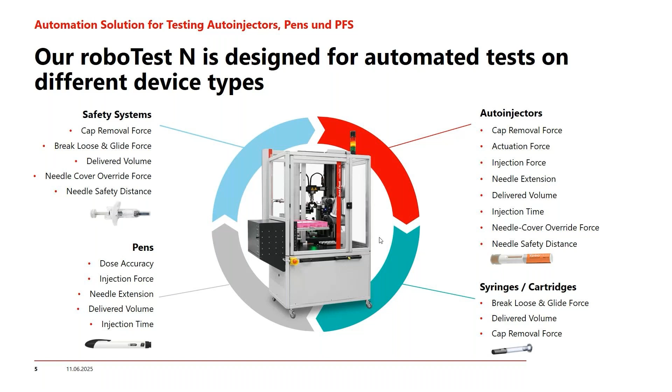A really important point is our safety concept here. We have two doors, one in front and one on the side. It's normally always the same. For every door, we have a safety switch for an extended safety door function between the robot and the testing machine, so that the doors cannot be opened while a test is running.

Additionally, we have a locking lever in the docking mechanism of the robot. So the automation can only be started after all safety switches and the locking lever are locked. This ensures maximum protection for the operator, of course.

That means if the robot is unlocked from the testing machine because of manual testing or other daily checks, then the safety housing of the machine itself will be valid.

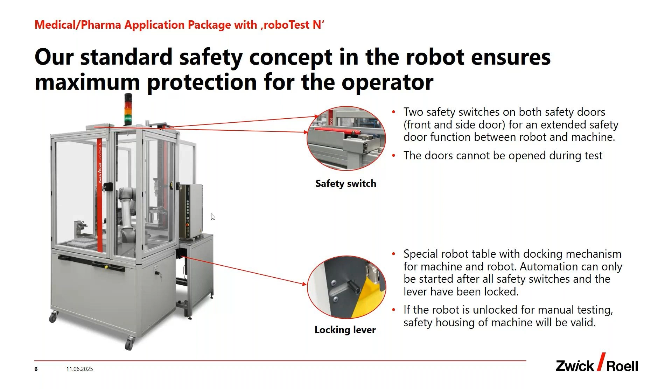Regarding maximum traceability, we have the option to implement a code scanner into the robot table. We know that in the medical industry traceability is really important, so we can read the data of the labeled devices as parameters into our software.

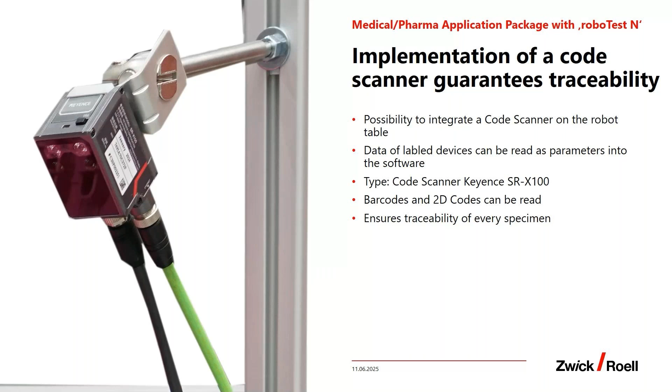For all of our automations, we have our own automation software called Autoedition. Autoedition is an intuitive software and it's really easy to operate. On the next slide, I will show you how Autoedition looks.

We are using it mainly for starting and stopping the automation, and also for preparing the specimen, as you'll see on the next slide. All of your test results are displayed as usual in testXpert.

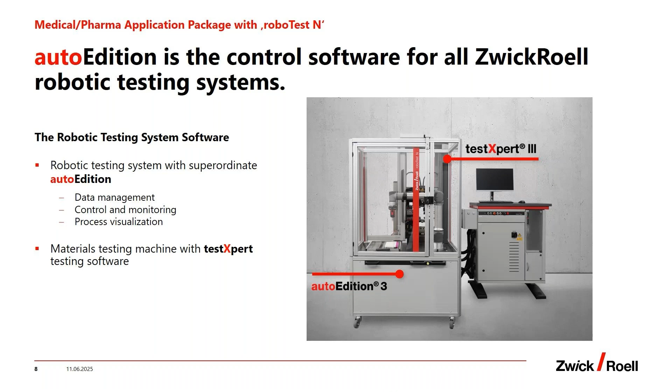Here on the slide, you can see a little better how Autoedition looks. We have the Autoedition screen divided into a main area and a toolbar. In the main area, you can see the testXpert operation window, which is standard with all your set parameters, diagrams, and results, for example.

The Autoedition toolbar includes a stop, a start, and a shutdown button, and also a button for the specimen office. In the specimen office, you can create your specimen, as mentioned before. Creating the specimen means deciding how many samples you want to test and at which row and place you want to start the automation.

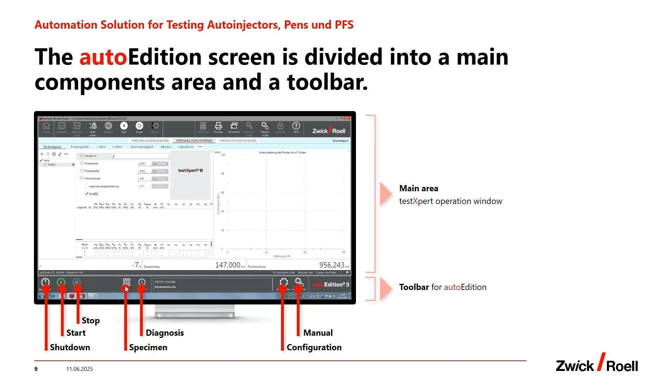On the next slides, you will get an overview about the specific features of our robot table. Here with our drawer magazine, you see it on the picture, we can increase the number of specimens to 150. That means 150 autoinjectors can be tested automatically without any interruption of the operator.

A few technical facts about the drawer magazine: we have 5 drawers for 1 tray each. The advantage here is that a customer can use their own trays, but in the beginning we have to test if the customer trays are possible at all, regarding the tray size or if there's enough gripping space between each autoinjector, for example.

If you as a customer have different device types and therefore different trays, we have different gauges on each side to adjust everything easily. The drawers have to be filled up by the operator before starting the automation, so every drawer will be filled with one of the trays.

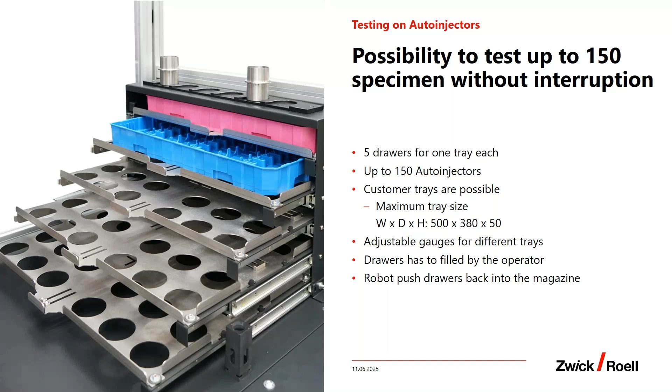So for an automatic run without interruption, there is an automatic beaker exchange required. That means we have 5 empty beakers in the beaker tray, which is stored on the drawer magazine. You can see it here on the picture, to save some space on the robot table because it's really limited there. We have 5 beakers with a capacity of approximately 100 milliliters.

So our robot replaced the full beaker out of the testing machine and replaced it with an empty one from the beaker tray. Later I will show you a video where you can see it a little bit better. After testing of the 150 specimens, the operator has to fill up the drawer magazine again and also has to empty the 5 full beakers. Then he can start the next automation again.

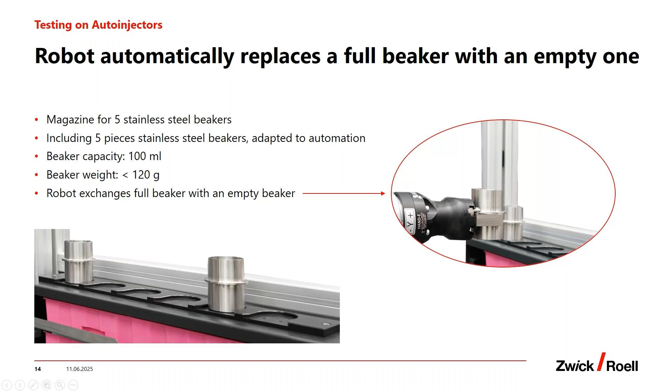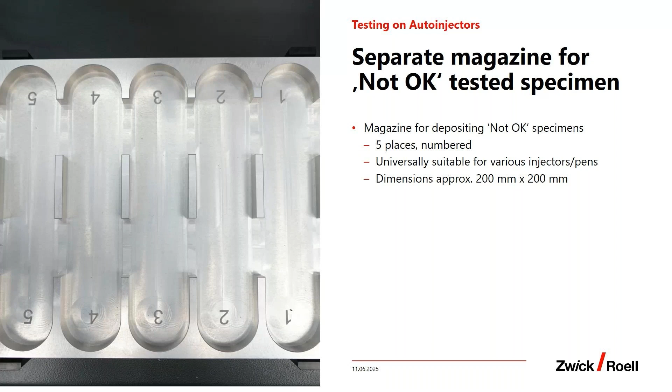So here on this slide, we have an additional small magazine for not-okay tested specimens. It's up to you, the customer, if you want to remove the tested specimen back to the drawer trays, or all not-okay specimens would be stored in this separate tray. In our opinion, we think it makes definitely sense to use the additional tray, because in this case it's easier for you to get a fast overview of all bad devices really fast. But as I said, it's only an option for you, it's not necessary.

So how does it work? The robot is picking a sample out of the tray. Then normally the barcode is scanned, you see it on the video on the next slide. The device will be placed into the testing machine. Then normally the test is starting.

At the same time, the robot picks a second sample out of the tray, scans the barcode, prepares the sample, and places the device into this additional gripper. Then when the test in the machine is finished for the first device, the robot takes out the tested sample and places it back into the tray. At the same time, the gripper places the second device into the testing machine. Then the test of the second device is started, and the complete process repeats in parallel.

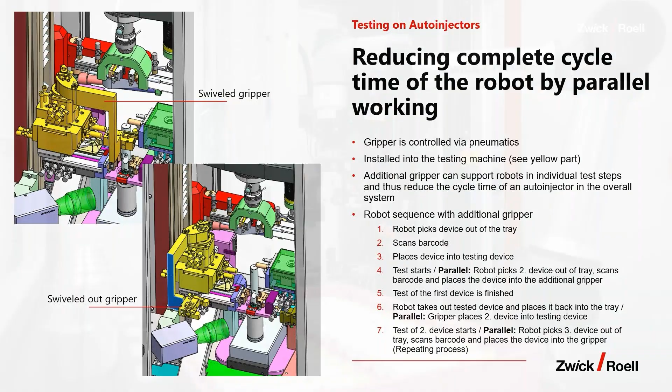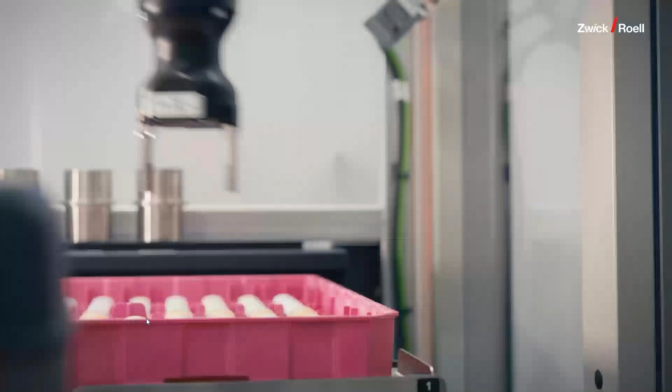So now I will show you the first video of today. Here you see a fully automated testing of autoinjectors. You see it here, the first autoinjector is removed from the first drawer tray. Then we have the barcode scanner here.

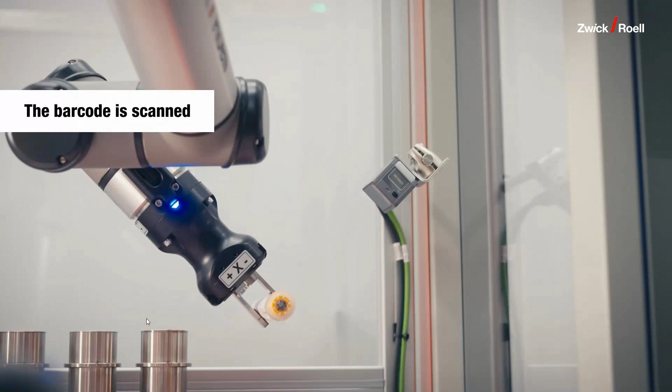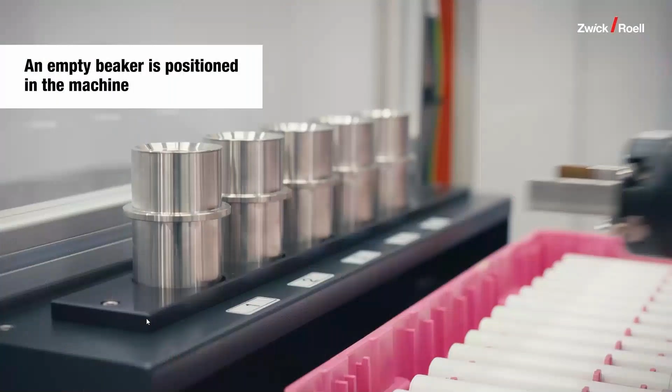Here, for example, you see an intermediate tray, which was our first solution for the cycle time optimization. But with the gripper shown on the slide before, you save a lot more time here. So then the first empty beaker is placed into the machine.

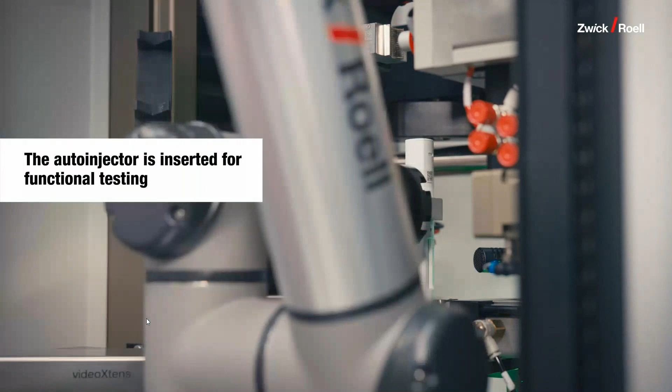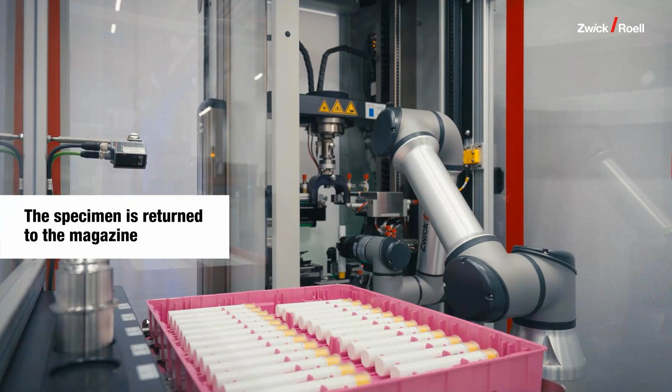So then the test will be started. We cannot see it here. And after the test, the robot places the sample back into the tray. In this case, we don't have a not-okay magazine here.

Normally, after the full tray is tested, then the full beaker will be replaced. It's not really shown well here in the video because we only see one tested sample, but normally when you test the whole magazine, the full beaker will be exchanged. You see it here, it's a little bit slower because of the liquid inside.

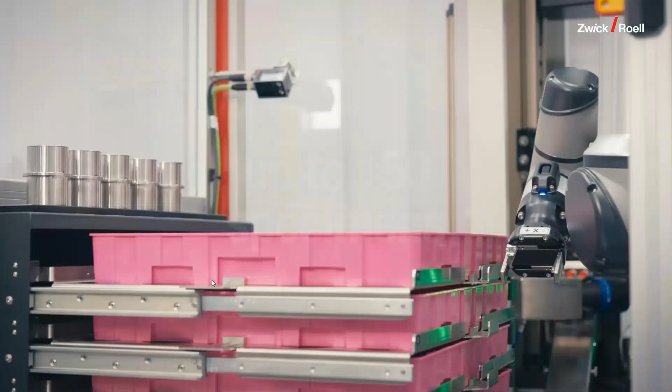Yeah, and here you can see the drawer magazine, up to 150 specimens are possible.

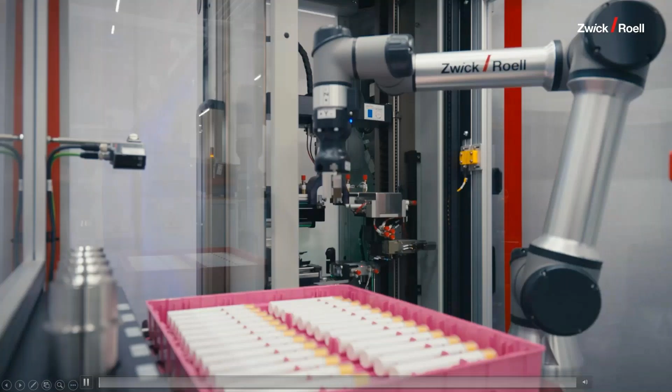So on the next package is for the safety system, so for the needle safety devices here. These safety systems can also be tested in the Autoinjector testing machine. We have special exchangeable parts for safety systems, so it's really easy to convert the testing device from autoinjector testing to NSD testing. In this case, we have the same effort for changing parts as for another autoinjector device type, for example.

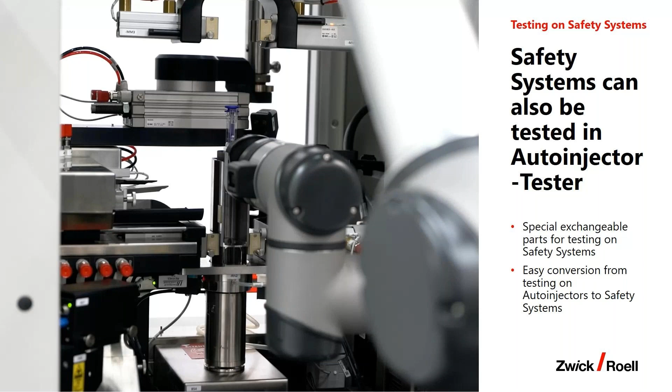The NSDs require a special insert to be tested into the testing device. Therefore, we have a special design magazine, which is elevated for the reachability of the robot. I will show you a video on the next slide where you can see it a little bit better in action. So all of our trays have their own 2D codes, not only for the NSDs but also for the autoinjectors, pens, and so on, which can be scanned together with other exchangeable parts with the Poka-yoke scanner before starting a test.

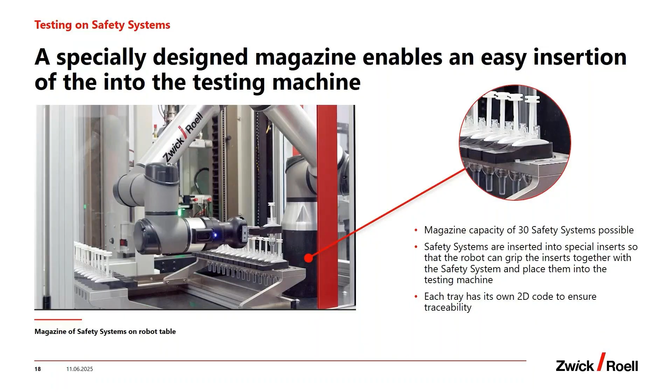So here I will show you our second video. You can see it here, we have a capacity of, I think, 30 specimens. Then we have the elevated tray, so the robot can really easily take off the sample and place it into the testing machine.

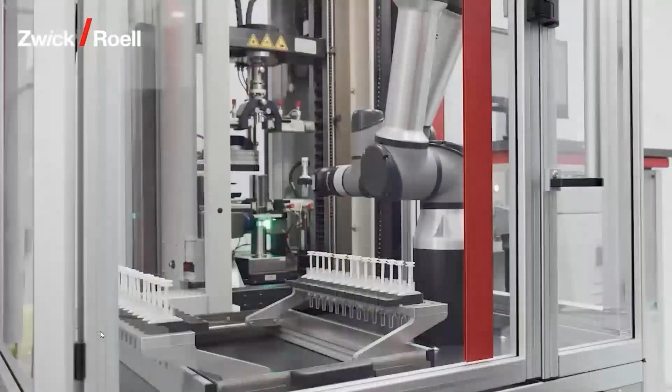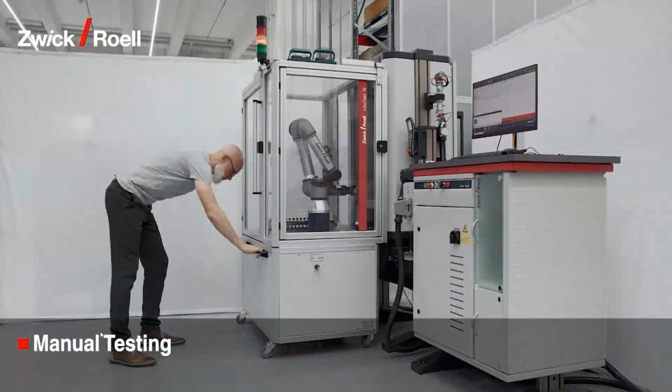And then similar tests like for the autoinjector can be tested here, so glide force, cap removal force. Then the specimen will be placed back into the tray. Here you can see we lock the lever on the side and then push the button, and it's easy to remove the robot table out of the machine, and then manual testing is really easy here.

So now we have our third package. I'll give you more information about the full automatic test on pre-filled syringes and cartridges.

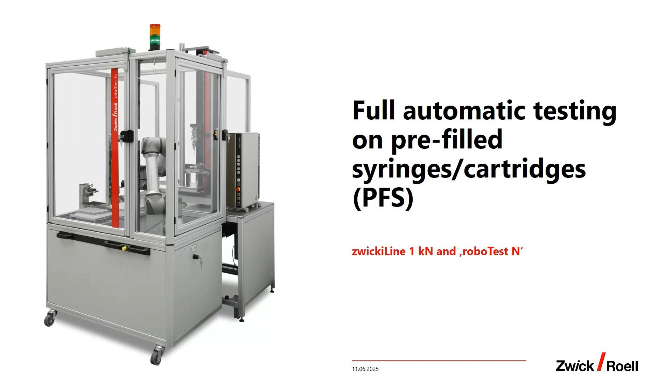We have here the same principle as for the autoinjector roboTest N. In general, we always have two safety doors, one in front and one on the side. You can use the side door for changing tools in the machine or doing daily checks, so it's not necessary to pull the roboTest N off the machine. The front door can be used for changing the magazine, for example. We also have a movable robot table, as you saw in the video before, so with this we ensure manual testing is possible at any time.

Here in this case, we have a special feature with a special table. This table has a docking mechanism and additional safety housing for the zwickiLine. You see it here - this means an easy attachment for the robot is always possible. You see here the docking mechanism.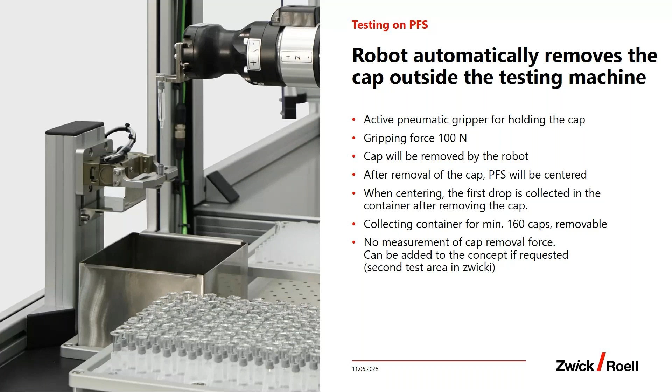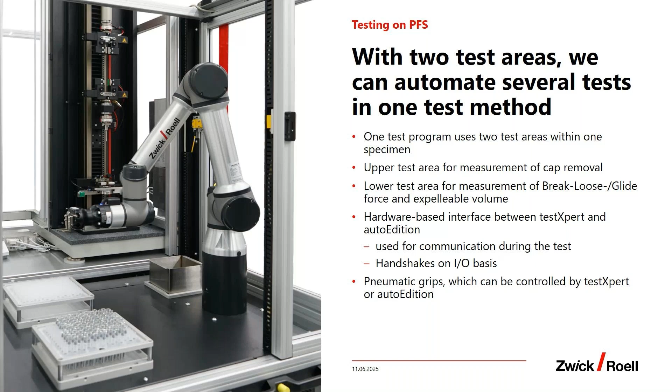So now I will show you a video, you can see it here. The robot grips out the first syringe. Then we have the cap removal station. The robot drives upwards, and now you see here how the robot is centering the syringe. And then we have the normal break loose glide force.

You see it here, it's no scale and a bigger beaker because the volume test was not necessary here or not required by the customer. And now the break loose glide force test is starting.

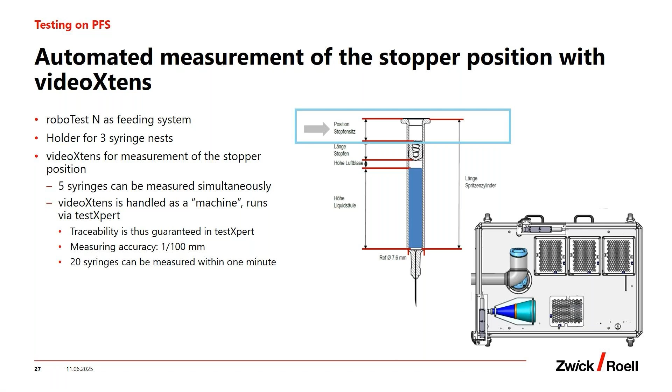So here I will show you in more detail how the measurement is going. The operator will fill up their nest into some holder, which you can see here on the picture. Then the automation can be started. Our robot with a vacuum gripper lifts up the whole nest out of the holder and places it in front of the videoXtens.

We have here a metal block, which pushes the desired row, in this case 10 syringes, upwards for the measurement. The videoXtens system can measure 5 syringes at the same time. The robot moves the nest from right to left, and we measure the first 5 syringes, then the others. After that, the robot moves the nest forward to test another row. The test duration itself is over 1 second.

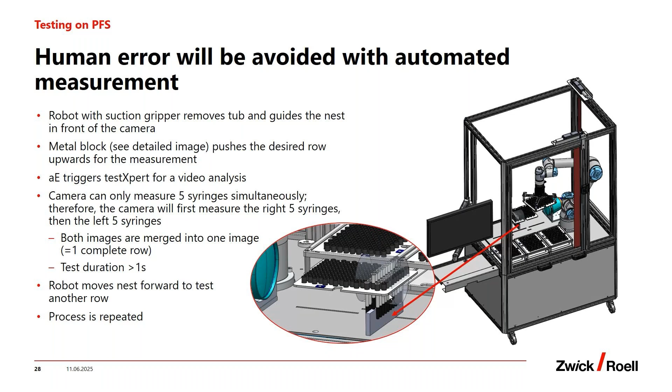So last but not least, we have our last application package. It's for pen testing. The needles will be screwed onto all pens by the operator before the automation is started, as you can see here in the picture. We can use the same drawer magazine like for the autoinjectors, and 150 specimens are possible to test without any operator interruption.

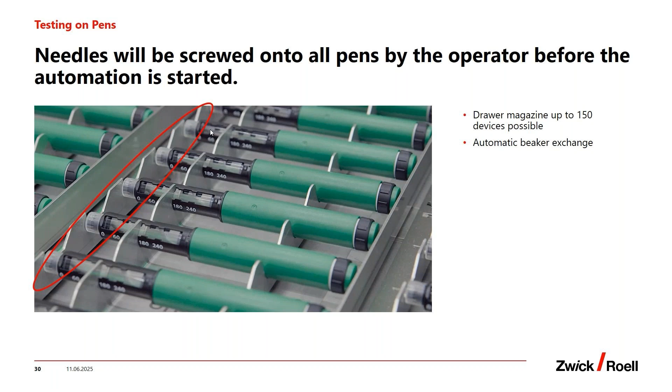Here on this slide you can see a picture of our cap removal station. We have a pneumatic gripper, and this gripper can remove the housing and the inner cap of the needle if the operator is not allowed to do that. The measurement is outside of the machine, so we do not measure the cap removal force, and the caps and housings will be collected in this container shown here.

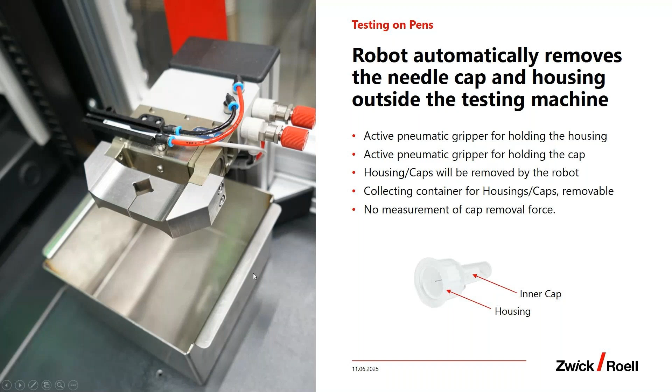You can see it here. The function of the shaking is to bring the air bubble to the top, the same as what a doctor is doing. After shaking, the robot places the pen with the needle pointing upwards into this upper part. Then the pneumatic gripper activates the pen button, and a light barrier detects if liquid is leaking. We also have a beaker, and the liquid will be collected in this small container beaker here.

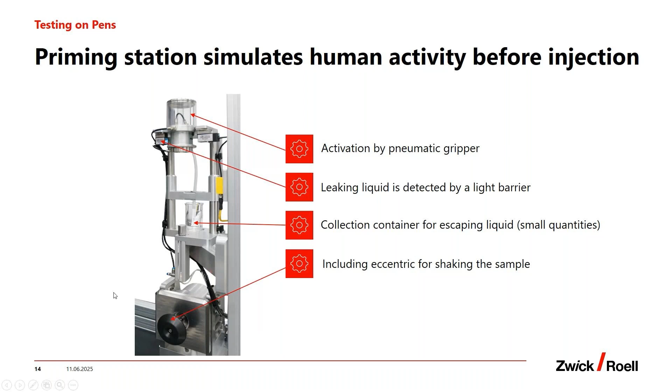So now I have our last video for today.

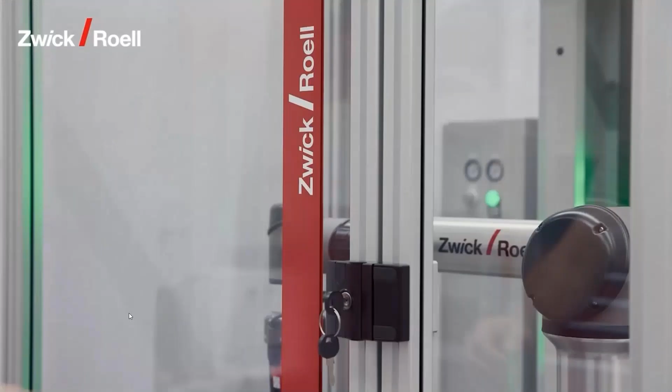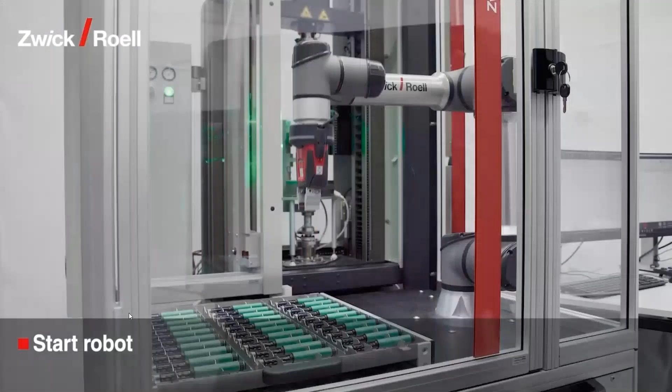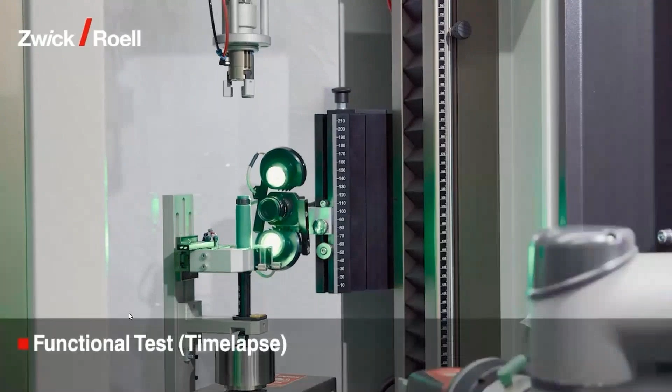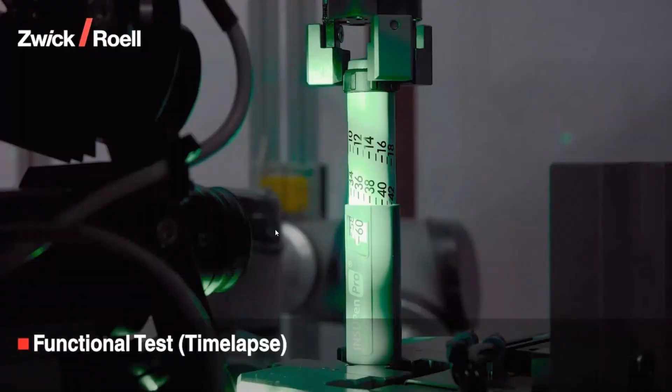Here we have automatic tests on insulin pens. In this case we have a single tray, but as I said, a drawer magazine is also possible. The robot picks up one device, places it into the pen tester machine, and then the dose accuracy test is starting. We have, as you see in the back, a video extensometer for optical number recognition. After the test, the device will be returned back.

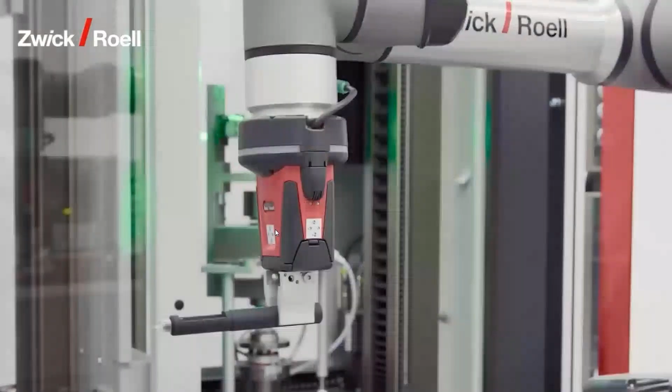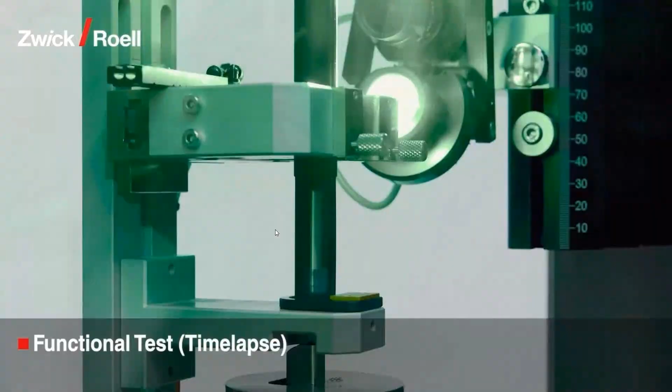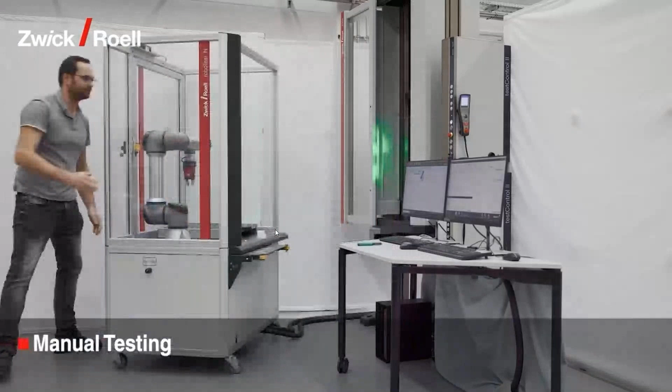For this customer we had 2 test types: a dose accuracy test, like you saw before, and a break loose glide force test. We have some dummy printed pens, and in these pens we have filled up, by the operator, cartridges, and then we have the normal break loose glide force tests. This is also possible. Here again, the easy attachment of the robot to the testing machine means manual testing can also be done really easily.

Now I will give you a short summary of all the presented advantages and features of the roboTest N system. First of all, it is a turnkey solution, so the customer can use the robot directly after installation and qualification. With the robot, we don't have any operator influence, which ensures reproducibility, so reproducible test results in this case.

We also have several types of grippers, and every gripper fits a wide range of different device types like pens, syringes, and autoinjectors. Our magazines are exchangeable for different device types, so our ZwickRoell magazines, but also your customer trays can be used. One important point here is that the easy work will be done by the robot, so the operator wins more time for more complex work.

All robots, as I said before, are running with our own software, autoEdition, which is really user-friendly, giving us flexibility for future applications. The movable robot table ensures easy access to the testing machine for manual testing, and we can retrofit our roboTest N system to almost all existing testing machines.